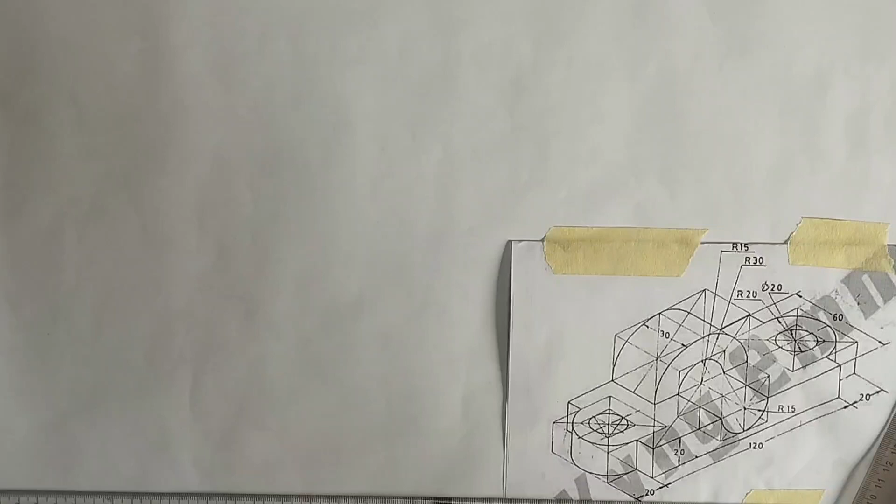In this video, we are going to be constructing the isometric block on the screen. So first of all, we are going to be drawing our straight line. That's our reference line. After that, we are going to be projecting angle 30, as you can see here. This 30-degree.

Please make sure you are using thin lines for this drawing. As we are going to be starting, make sure you are using thin lines for all lines. All construction lines must be in thin line. So we draw this. As you can see, this place is 20, so we'll pick our 20 millimeter. So we'll pick our 2 centimeter.

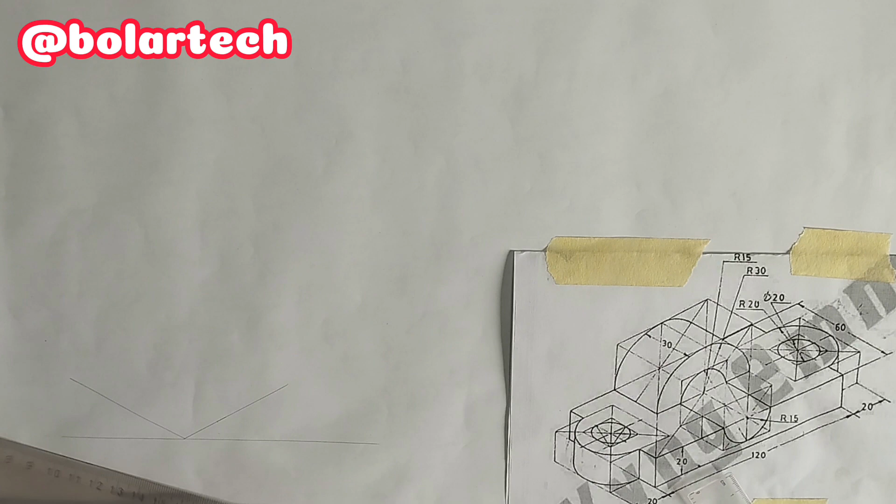From that point, draw another line coming like this. So this place is going to be 10 millimeter. That's 1 centimeter. We pick it like this. So from that point, we are going to be drawing a straight line. Please make sure all your lines are in thin lines.

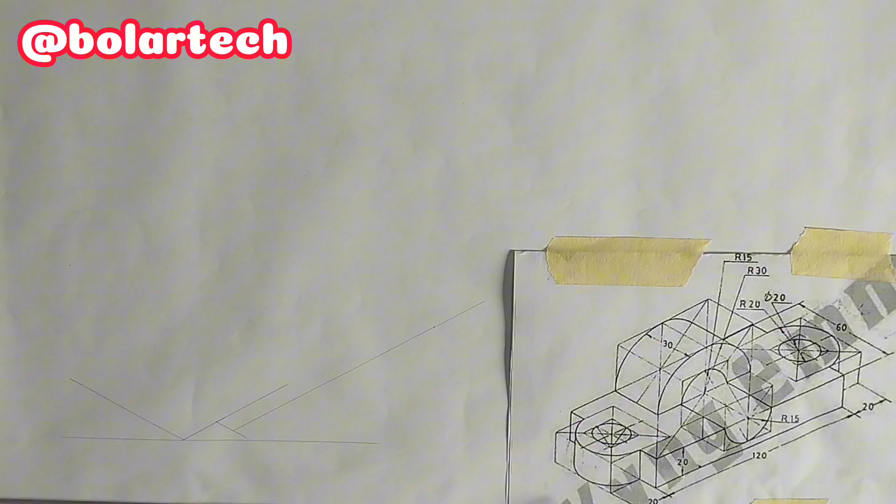And as we can see, this is 120 millimeter. So this place is going to be 120. That's 12 centimeter. So now we draw a straight line up like this, and in this part also we draw another one up like this.

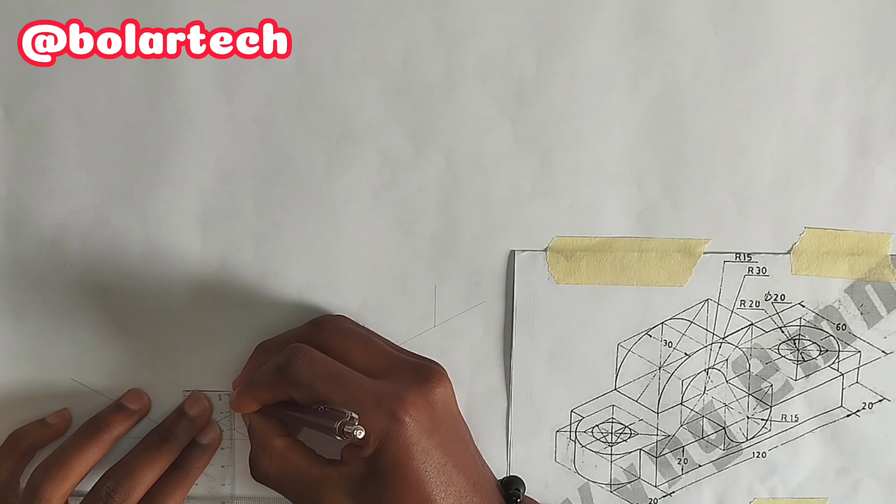So as we can see in this place, this is 20 millimeter. So we pick our 20 millimeter here and draw like this. Draw like this. So from here, we are going to draw a straight line upward here. So with our angle 30-degree, we join it here.

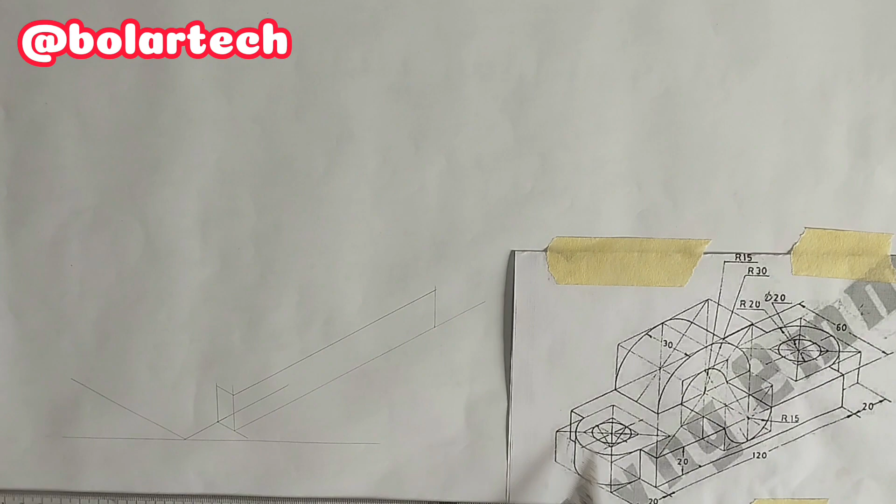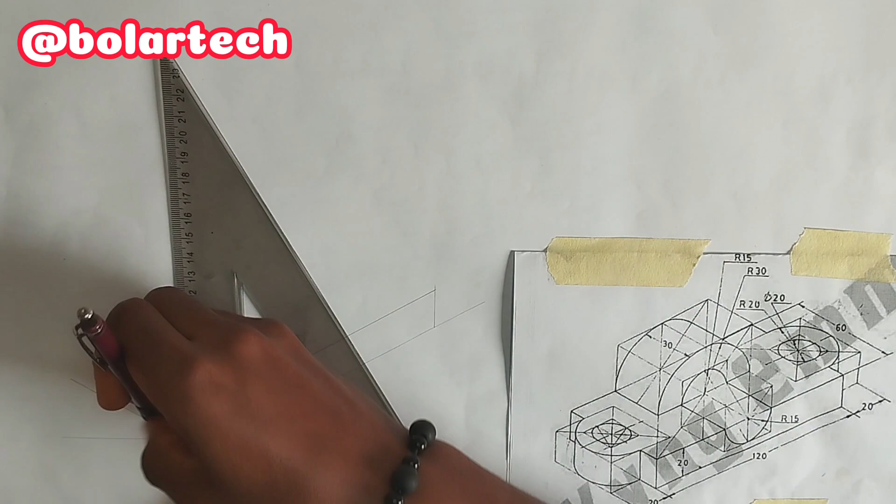Now we are going to be drawing this place that is here, and as we can see, from here to here is 60, and this place is 10, this place is 10. So definitely this place is going to be 40 millimeter. So we'll pick our 40 millimeter from here. This is 40 millimeter. So we draw our straight line up like this. So from here also we draw straight line up like this.

So using our set square, we draw like this, and we draw like this also. So that's that for this place. So now we are going to be drawing this top here. So we'll draw our inside like this. Please make sure all your lines are in thin lines, and as we can see, this place is a continuation here. So we are going to be using our set square like this,

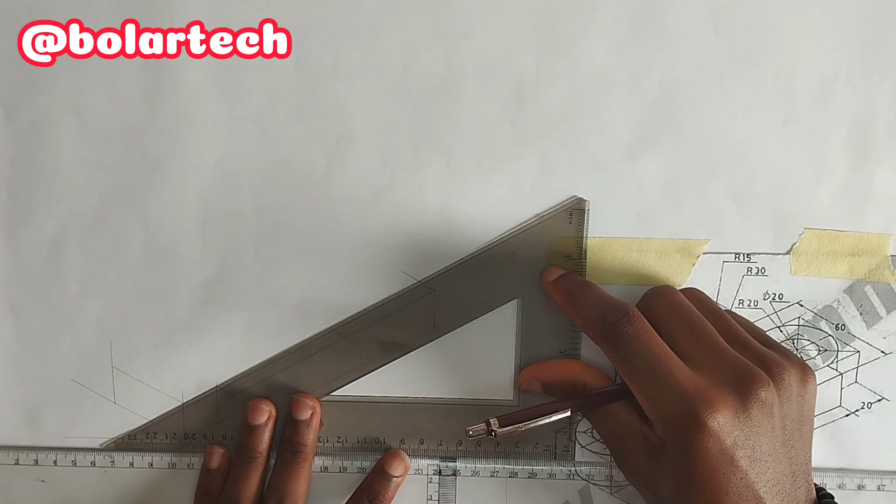and as we can see, it is 20 millimeter. So we'll pick 20 millimeter there like this, and from that point we draw our 30-degree like this. Please make sure all your lines are in thin lines. So this place is going to be 40 millimeter, just as the down part is going to also be 40 millimeter.

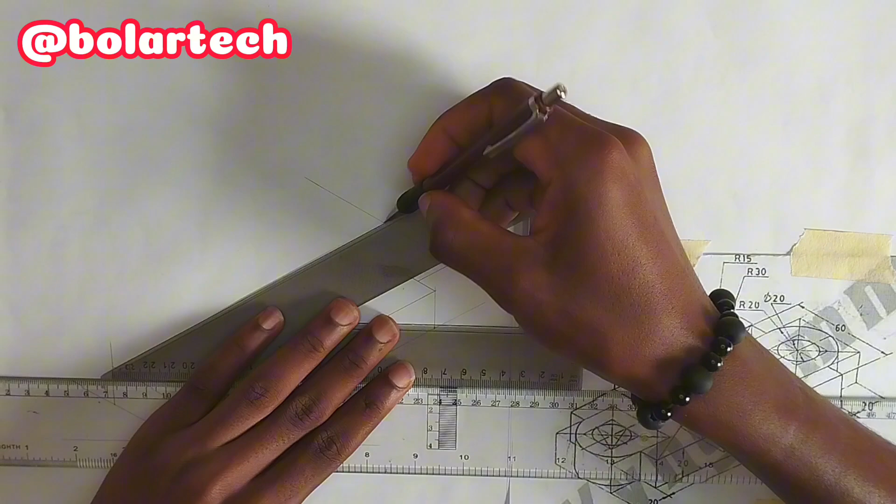So that's for that. We'll pick here also like this, bring it down. So this place also will be like a continuation for here. Draw here. So without forgetting this part, let's quickly draw this part. So from here, this place is going to be a continuation for here. So we just draw from this place like this, and join the line like this. So we have done that already.

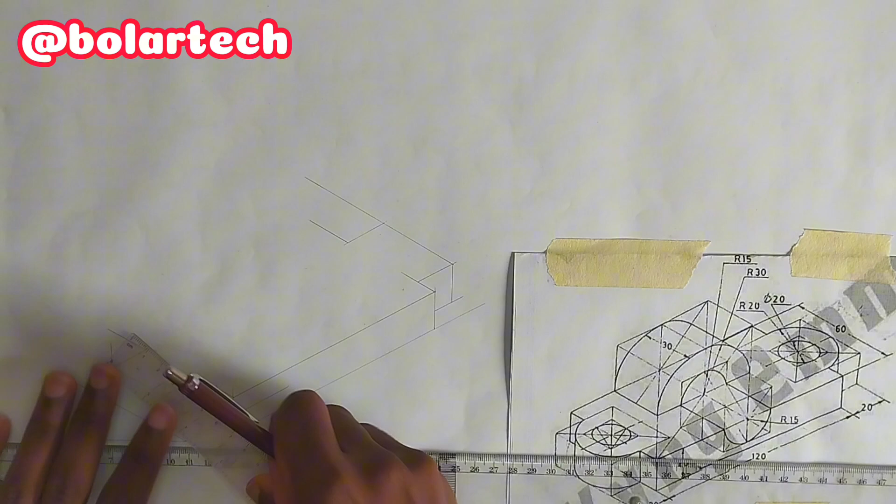So now this place, we are going to be picking our 10 place. But before we do that, let's first of all bring this like this first, then this line is going to be continued here. So it's going to go like this. This isn't touching it well, so let's bring it. So this place is going to be 10 millimeter. That's 1 centimeter. So we pick it like this. So from here, the line is going to be hitting this other place. So we draw it like this.

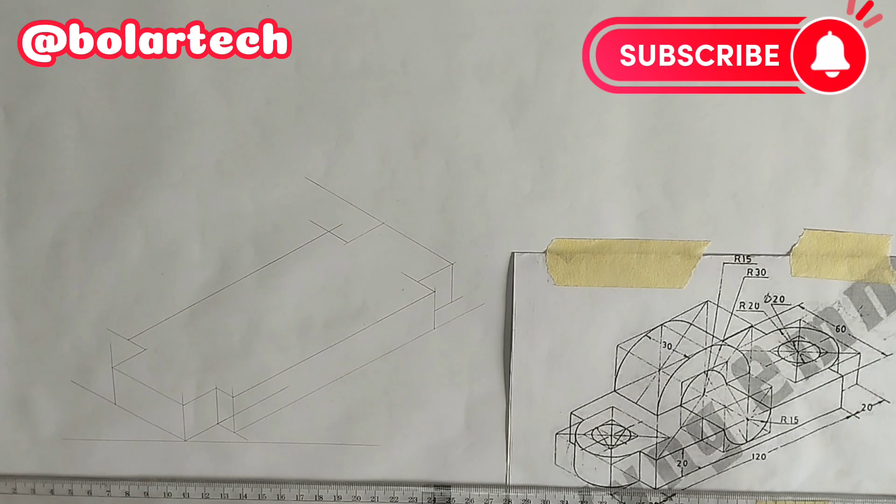Okay. So now we are going to be drawing this part of the circle, that is this part that is here. So as we can see, this place is 20, and we have the radius of this circle to be 10 millimeter, and the diameter is 20 millimeter. So what we are going to be doing now, we'll pick another 20 millimeter like this.

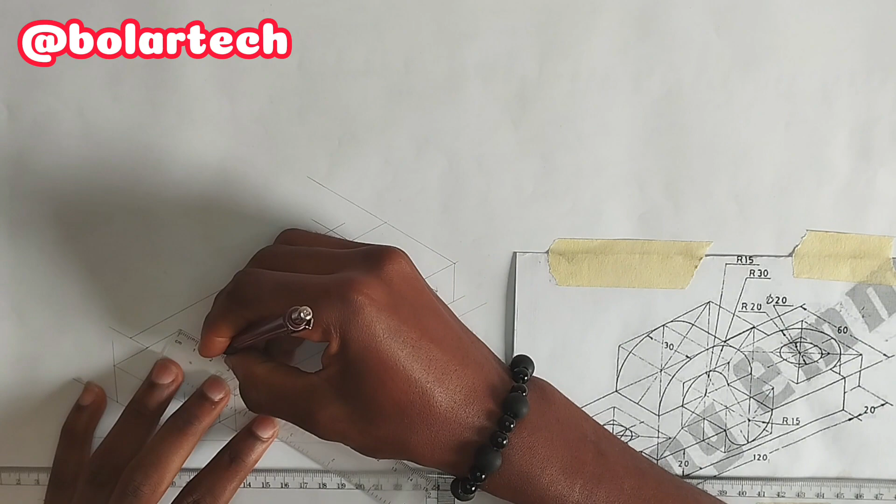Are you with me? So now we'll project a line like this and another like this. Then from here we are going to be joining these two lines. So we are going to be picking the middle of this line, that is 20 millimeter. So we'll pick here like this, and we are going to draw it like this, and like this, and like this. So in order to draw this circle in the middle, we are going to be picking the longest edge of this particular square.

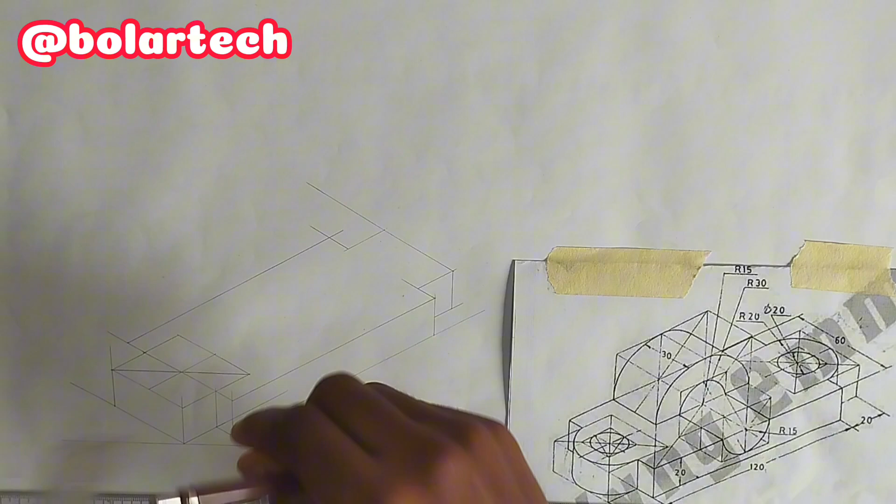So we are going to draw a straight line for the longest edge. It is not going to be here because this is not the longest edge. This is the longest edge. So that's where we are going to be drawing. So from there, as we know, the diameter of the circle is 20 millimeter, so we'll pick 10 millimeter to each side. That is 10 here, 10 here, and 10 here, and 10 here. So let's draw a square.

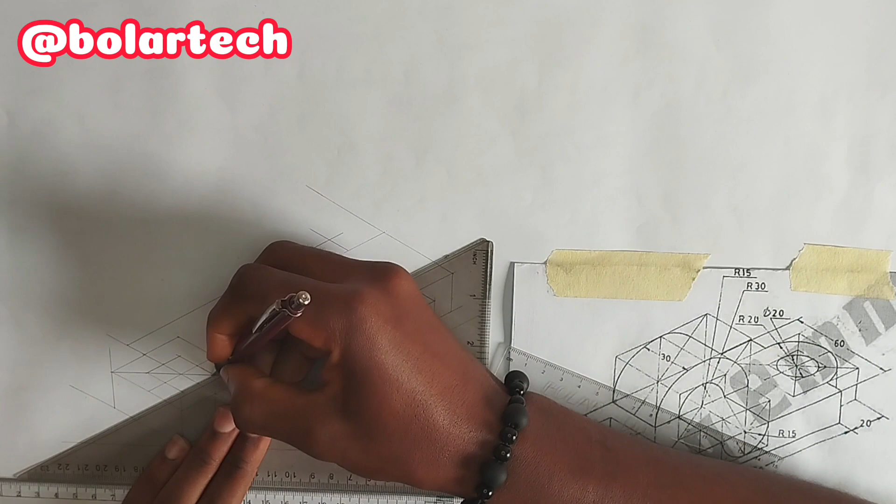So it will go like this, like this, like this, like this, and like this. So now from this point, we are going to draw a straight line here and a straight line here. So it goes like this, like this, and like this.

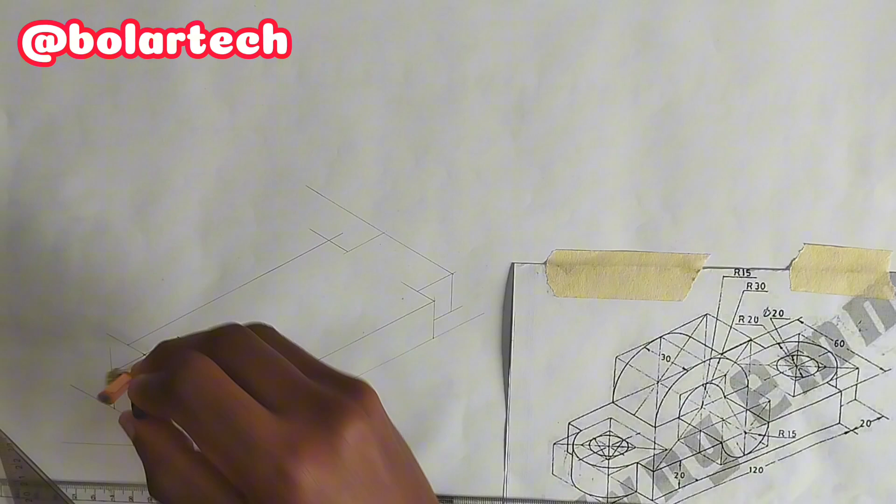So now we are going to be making use of our compass. We are going to first of all place our compass at this edge here, then measure this edge to this edge, draw our curve first, then you place it at this other edge, draw our curve. I will advise you to be thickening out the curve, because it is not always easy to thicken out circles after the drawing, so I will advise you to thicken out the circles as you are getting it right.

So we'll place it at this point also, draw here, and place it at this place also. So we draw this last curve. So that's for this circle that is here.

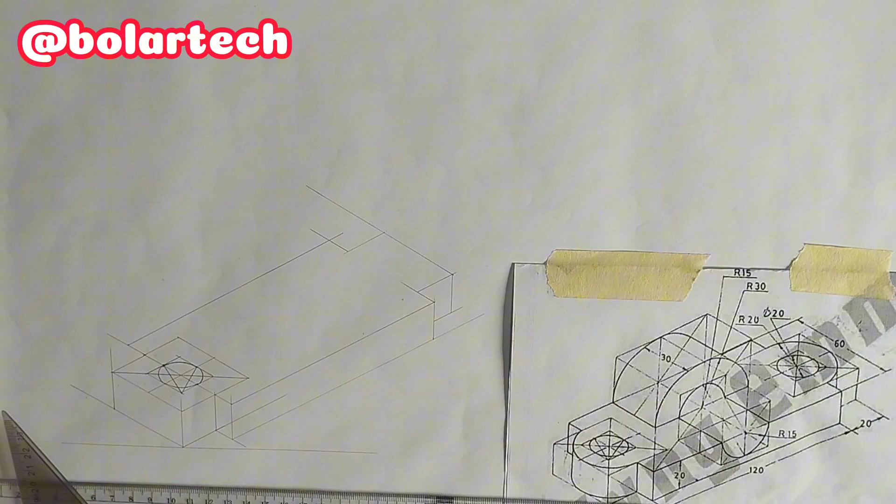So now we are going to be drawing this particular curve, as we can see in this place. So to draw that one is very simple. We'll pick from this edge here, and just draw a nice curve from this edge.

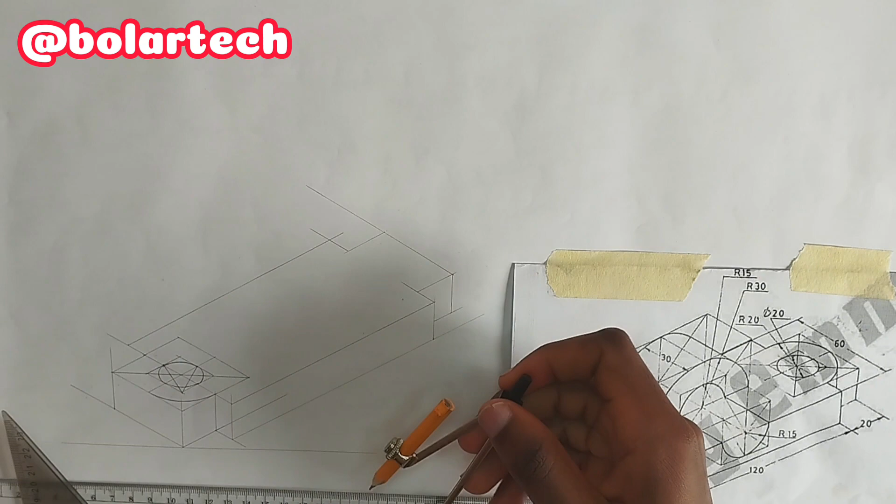Then to draw this place, as we have done in this place, we are going to pick from here to here with our ruler. We'll draw just a straight line from this edge to this place with our ruler. So where the line is cutting each other with this diagonal, we'll just draw a curve. So that's the way it is going to be.

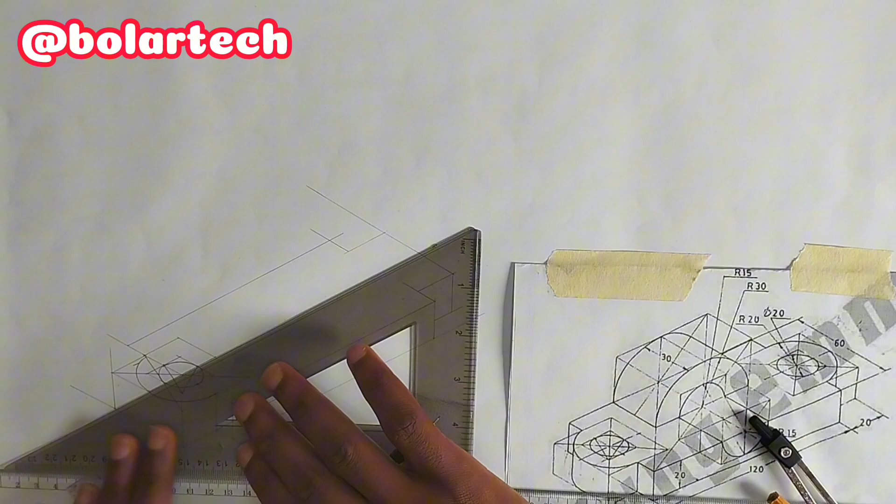So now we are going to be drawing the other curve that is going to be down here, that is this place. So to draw that one, we are going to be projecting this place like this. Please make sure it's in thin lines in order not to get confused. We project this place like this. This place is projected already, so we pick our 40 millimeter from here. So from this place, you join it with this other point.

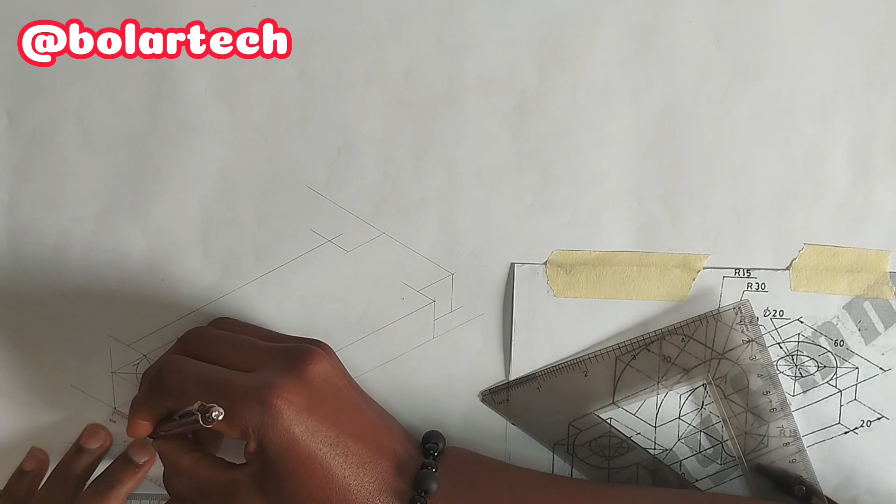I will advise you to thicken out those 4 points at which you have picked your 40 millimeter in order to avoid confusion. So we'll pick half of this line, that's 20 millimeter, like this. So it will be like this. So we are going to pick half here also, which is also 20 millimeter. So this is it already. So we'll draw it like this.

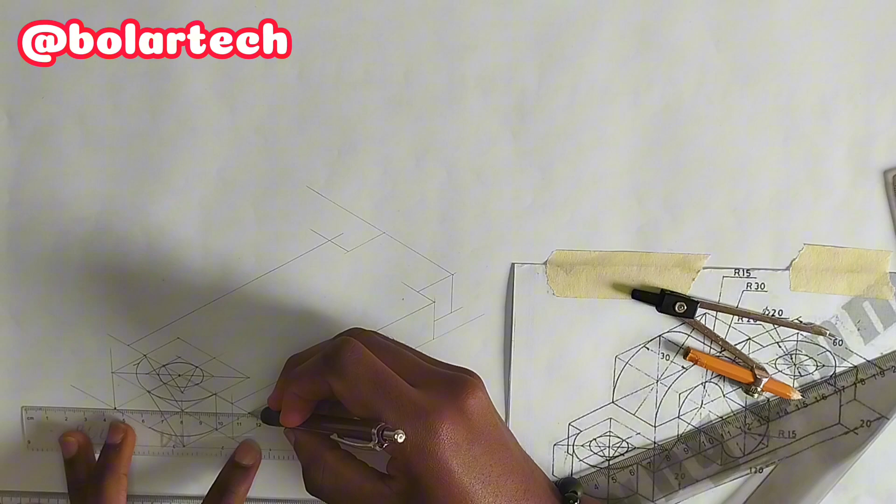So now, in order to draw this curve, we are going to place our compass first at this point here. Place it at this point, make sure it's touching here also. So we'll join it like this. So in order to draw here, we are going to pick our compass, our ruler, and our pencil. We'll draw from here to here. We're also going to be drawing the diagonal. Don't let us forget that.

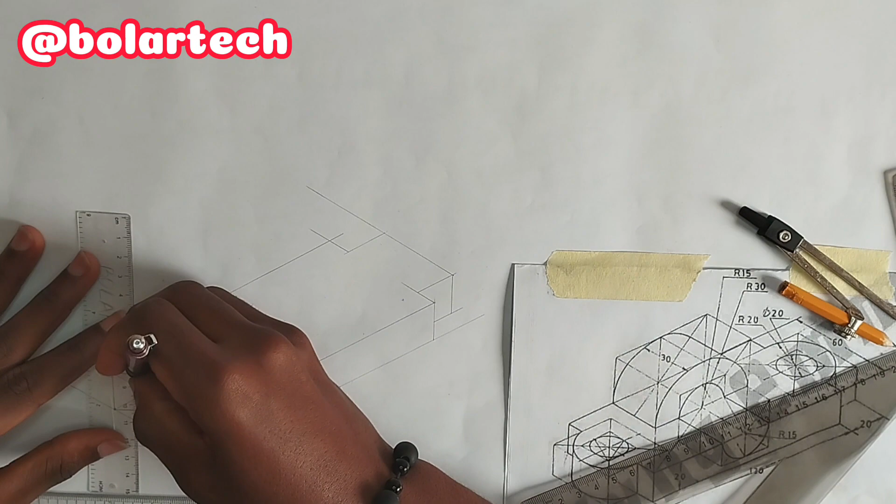So from this point at which it is cutting the diagonal, we would draw our curve. So in order to perfect it, this place from here and here, we are going to join it together, and also here and here is already joined together like this. So you can just thicken this place out. So that's for here. Let's draw our straight line here. Yes, that's for this place.

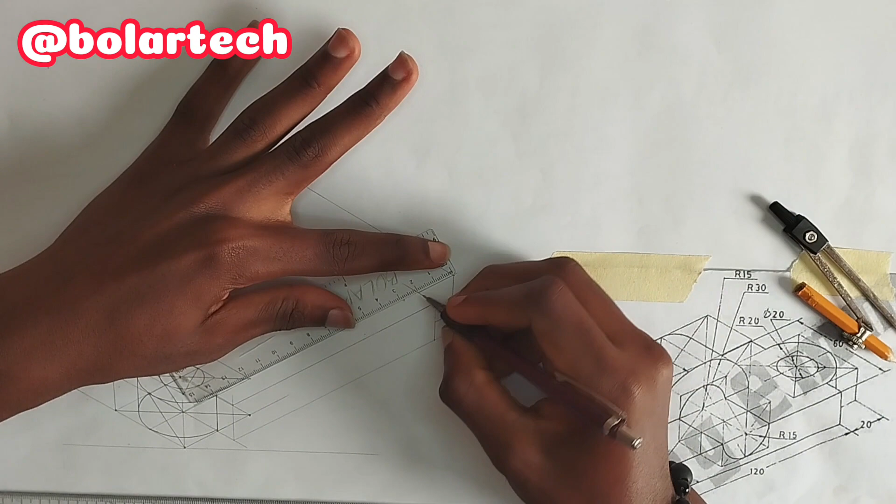So now we are going to be moving to the back part also. It's also going to be the same way. So this place is also 20. So we pick our 20 here and 20 here. So it's going to go like this, and like this. So we draw it like this.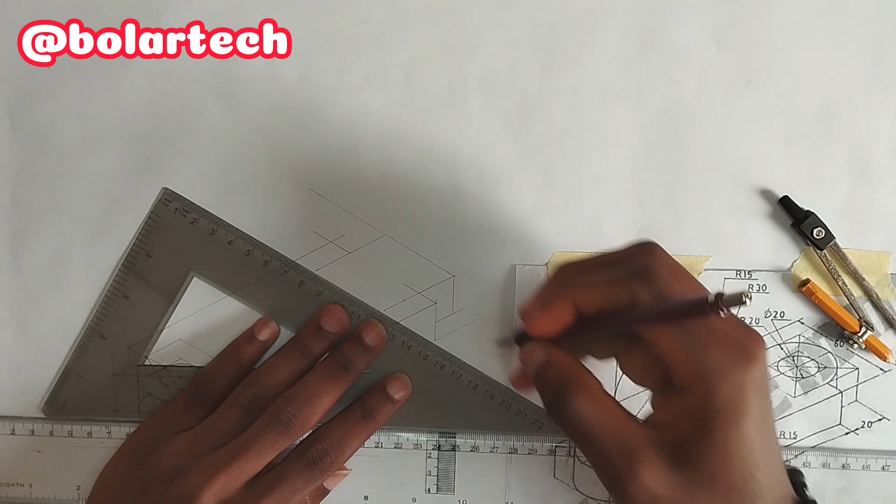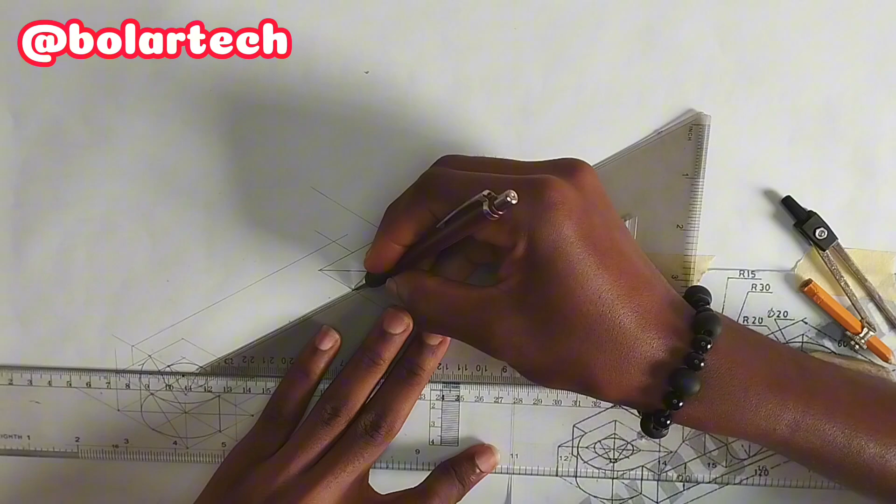We are going to be drawing this box inside here. So in order to draw that, we are going to first of all draw our diagonal, that's the line that is passing through this place. So we are going to pick 20 millimeter here, that's half of this place. And we're also going to be picking 20 millimeter here, which is already there. So we'll pick our T-square like this, our set square like this.

I will pick here also like this. So now, as we can see, this place is diameter of 20 millimeter. This place is diameter of 20 millimeter. So we are going to be picking 10 millimeter up, 10 millimeter up, 10 millimeter here.

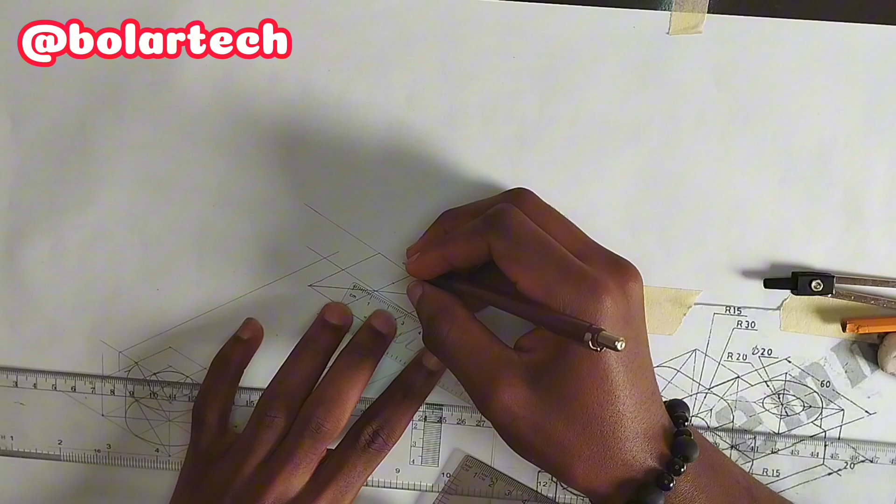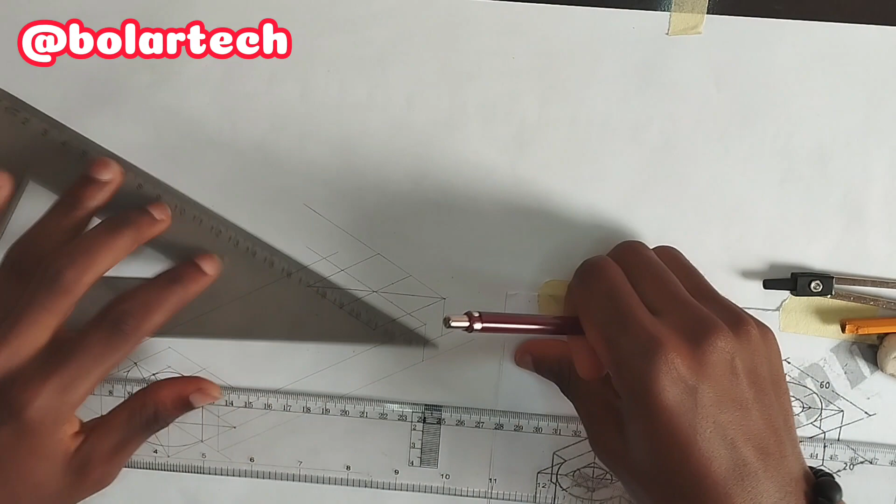So we pick 10 millimeter to this place also, like this, and 10 millimeter here also, like this. So we are going to draw this like this, like this, like this, and like this.

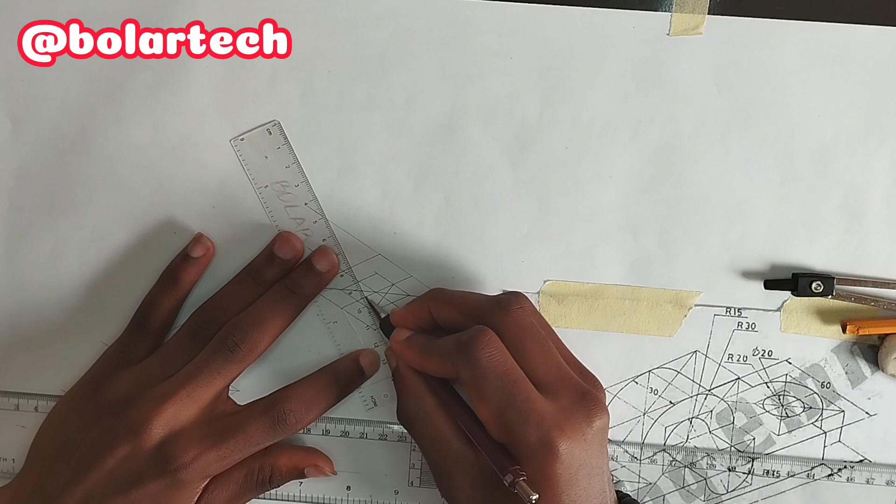So now, in order to draw this circle, we are going to pick from this point, from this last edge here to this point, first of all, the same way we did for the first part. We pick from here to here, and from here to here. Placing your compass at this edge here, this last edge here, you place it at these 2 points. Make sure it's touching those points.

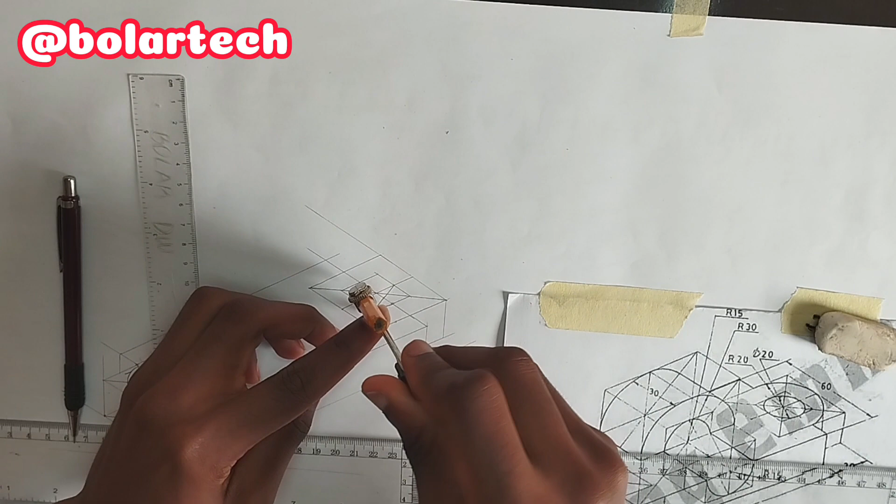So we draw our curve as usual, then we place it at this place also, same way we have done at the first place. So we draw our curve, then we place it at this point, as you can see here. Draw our curve, then at this place also, like this, to draw our curve.

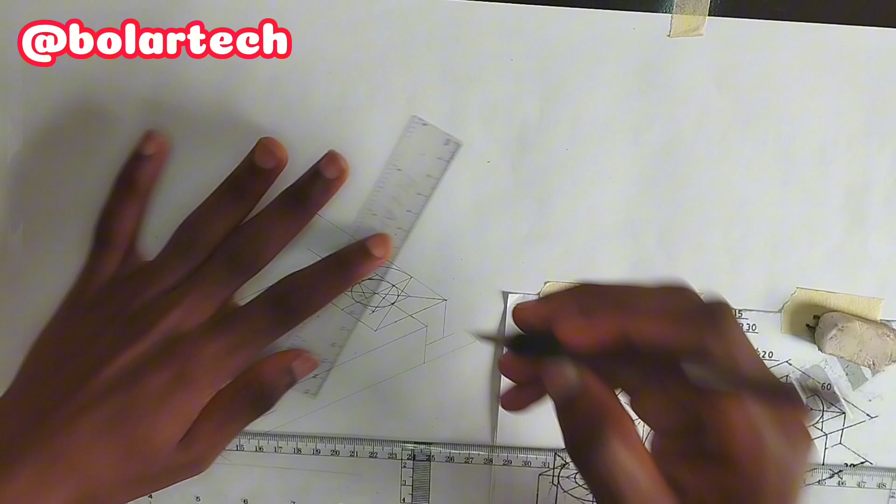So now we are going to be drawing this part here, which is very easy. From this place we are going to extend our compass like this, and draw an arc here, like this. So now, in order to draw here, we are going to be drawing a straight line from this part to this place. So where it is cutting the diagonal line, we are going to put our compass there and place our compass at the edge of this place, and draw our curve like this.

So we are going to be drawing this straight line down, which is very simple. So from this point here, this diagonal point, we just pick our straight line down. So that's that for this place. We are going to be moving straight to the center, which is this place.

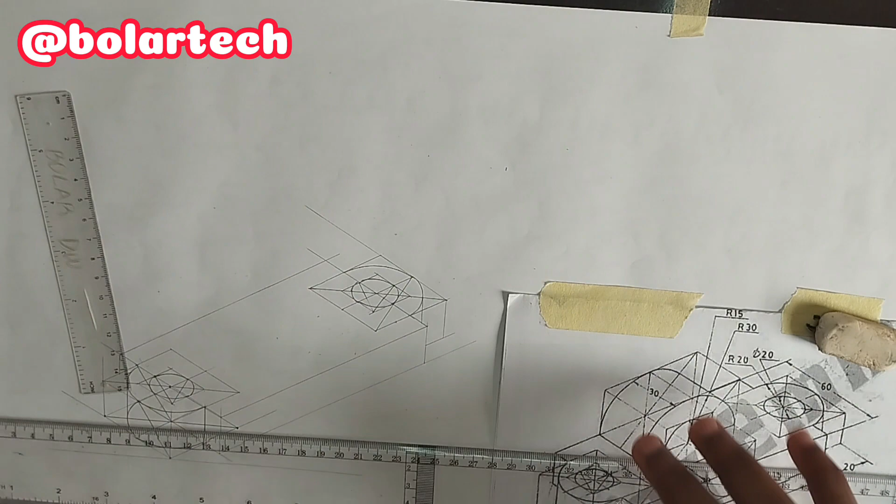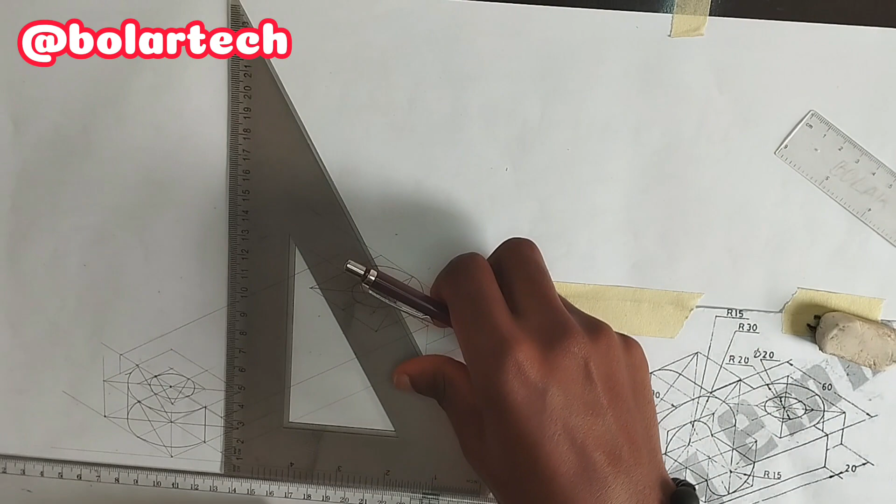So now, in order to draw the center, we can see that this place is 30 millimeter. So we are going to be drawing a straight line upwards from here, like this. So from here to here is 30 millimeter. So we'll pick with here, and it's 30. So this place to this place is 30 millimeter.

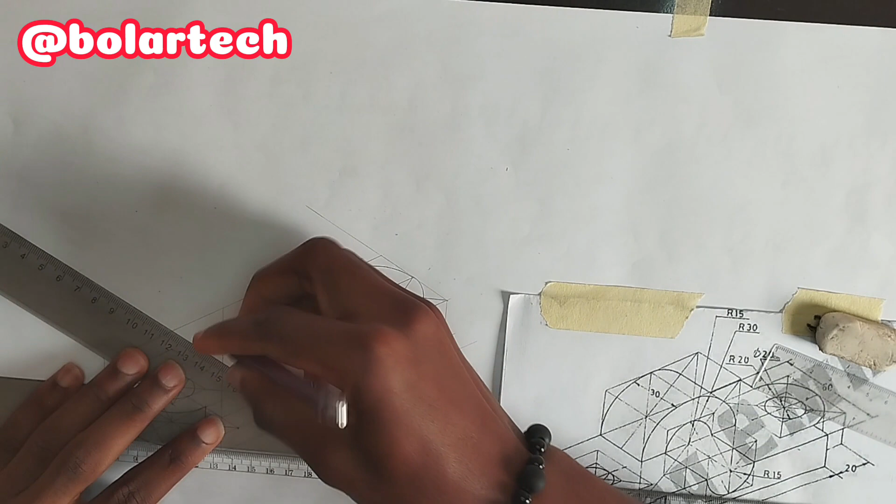So we'll draw our 30 degree like this, and we draw like this also. So it's going to go like this. Please make sure you are using tinting lines. And we'll also draw our straight line up. So this place is also going to be 30 millimeter. So we pick 30 millimeter here. This place also is 30. So we'll extend here up a little bit, just 30.

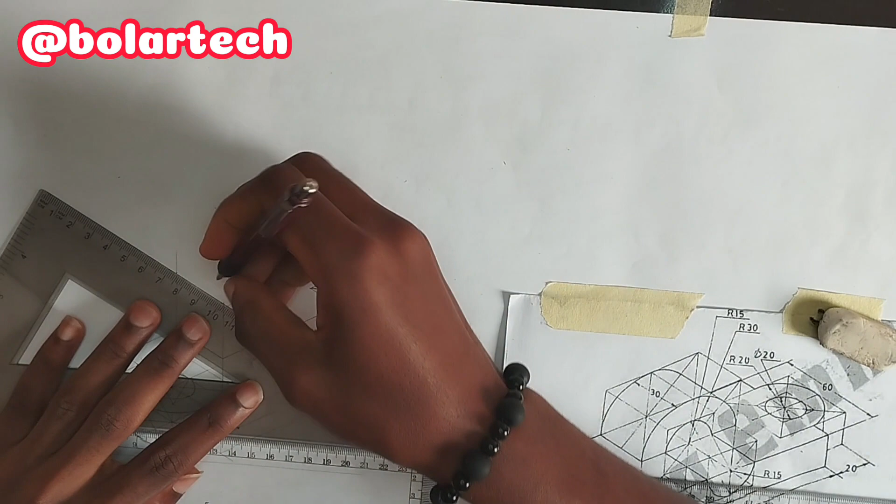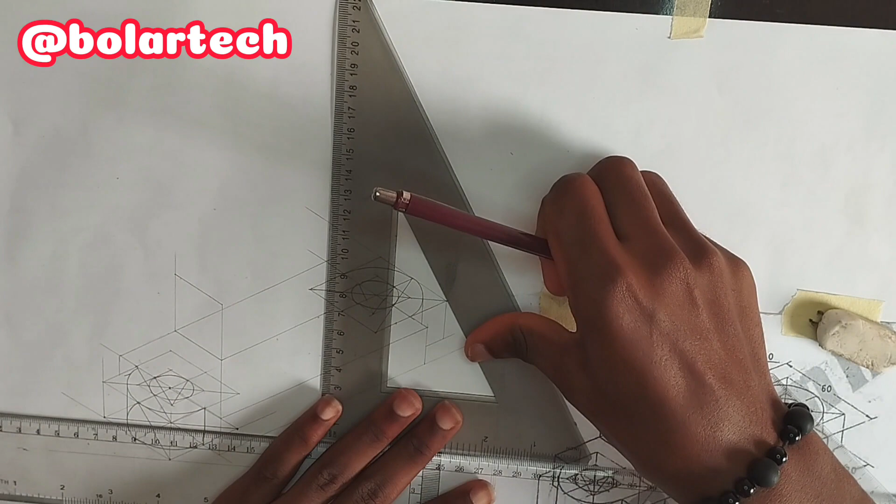So we are going to be drawing like this. So this place, as you can see, is 60 millimeter. So we'll pick 60 millimeter on our ruler. So now we are going to draw a straight line upward from here also, like this, and also draw to this point like this also. Then we are going to be drawing from here like this. So now we have drawn the box.

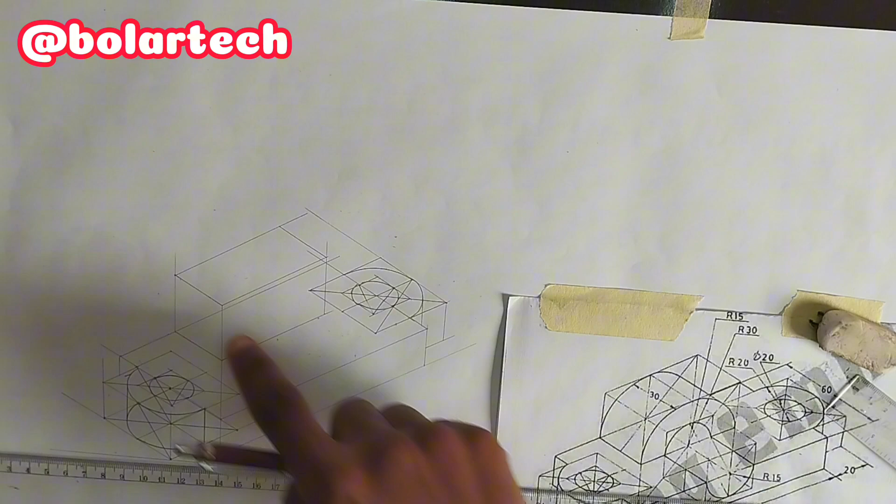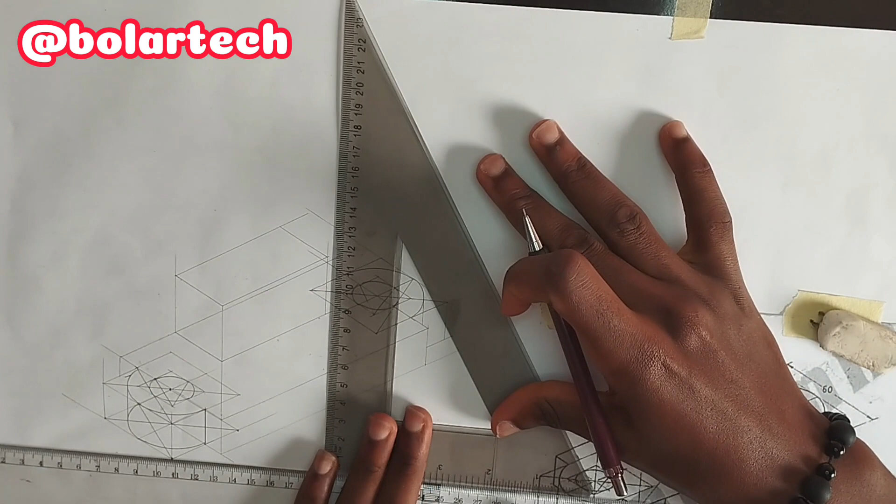We are now going to be drawing the curves there, which is always the easiest part. So first of all, we'll start with the front curve. So we'll draw our line down. We want to draw a half curve. This place is 30, so we'll pick another 30 millimeter downward, and here also we'll pick another 30 millimeter downward. So we draw a straight line from that point to this place. So we are going to be joining these two lines together like this.

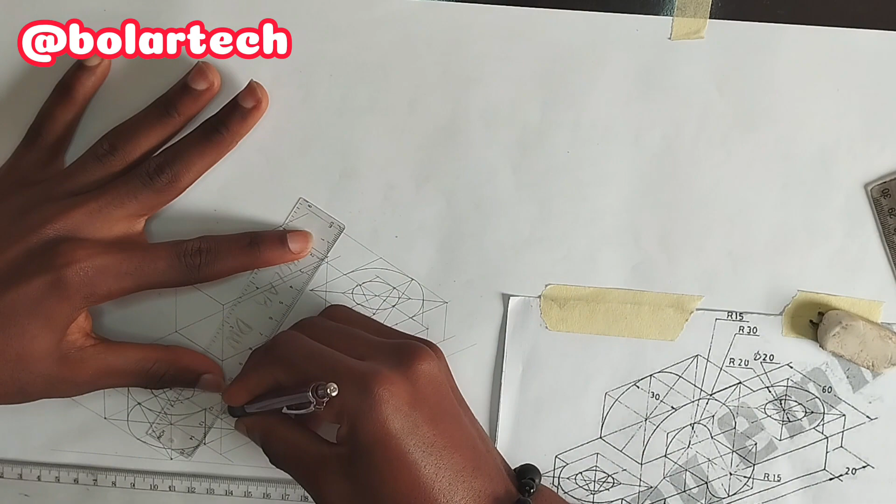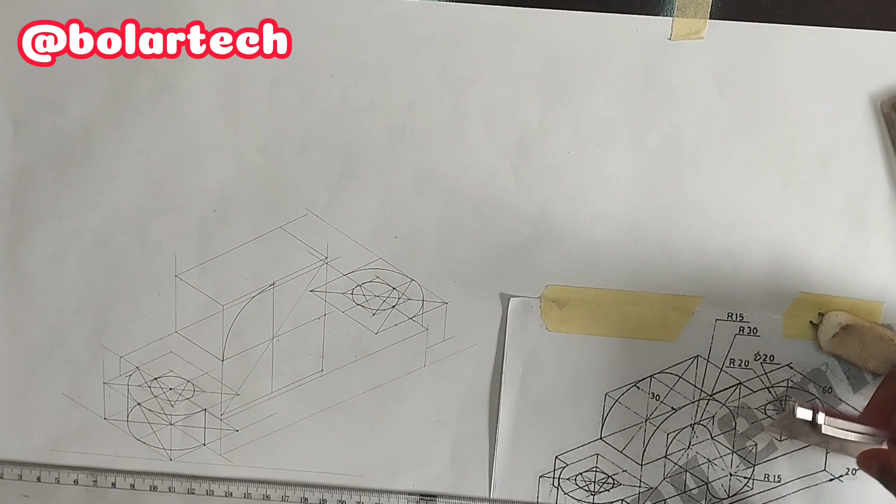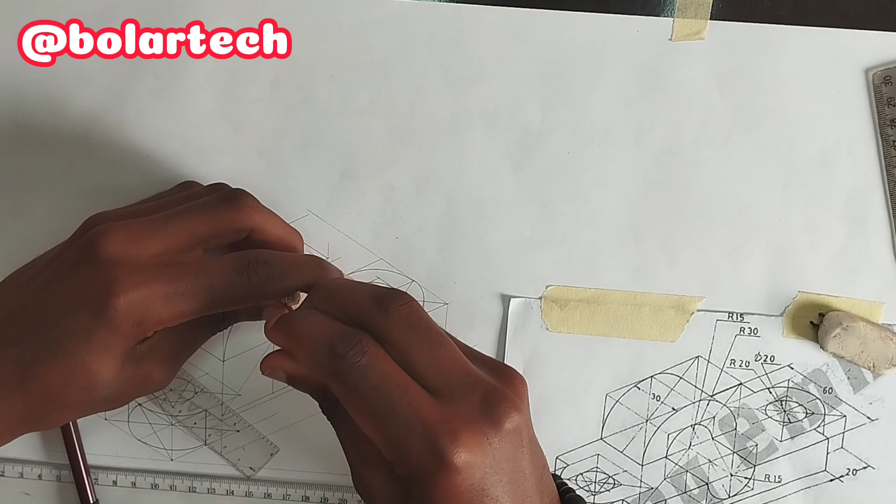Curve like this. So now to draw here, as we have been doing in the previous ones, we would draw from here to this edge here like this. So from here we'll pick this point, then from this point we draw our curve like this. So that's the way it will be.

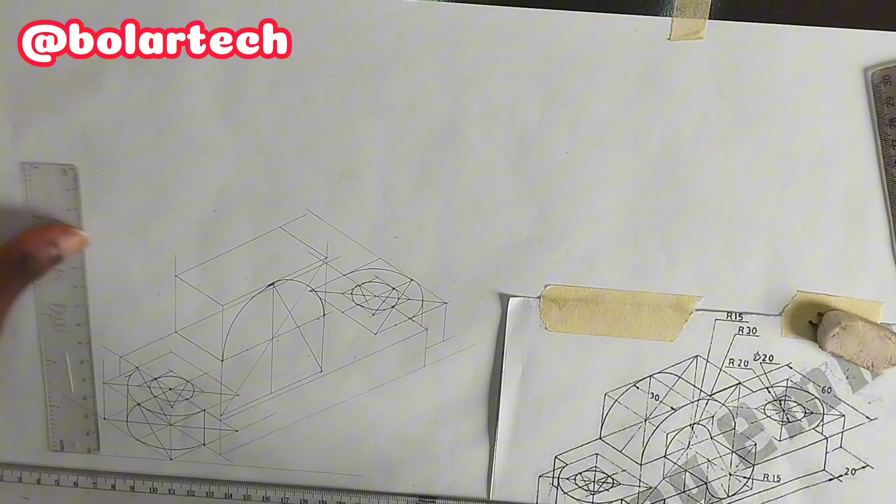So we are going to be drawing the one at the center. As we can see, the radius is 15 millimeter, so the diameter is going to be 30. So we just pick our 15 here, 15 to the left, and 15 to the right. 15 millimeter. So we'll pick 15 up and down here also like this. The radius is going to be 15.

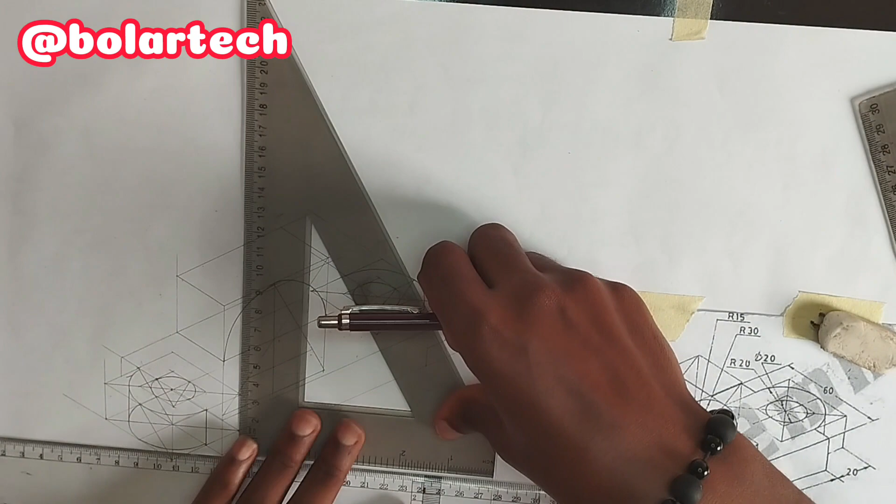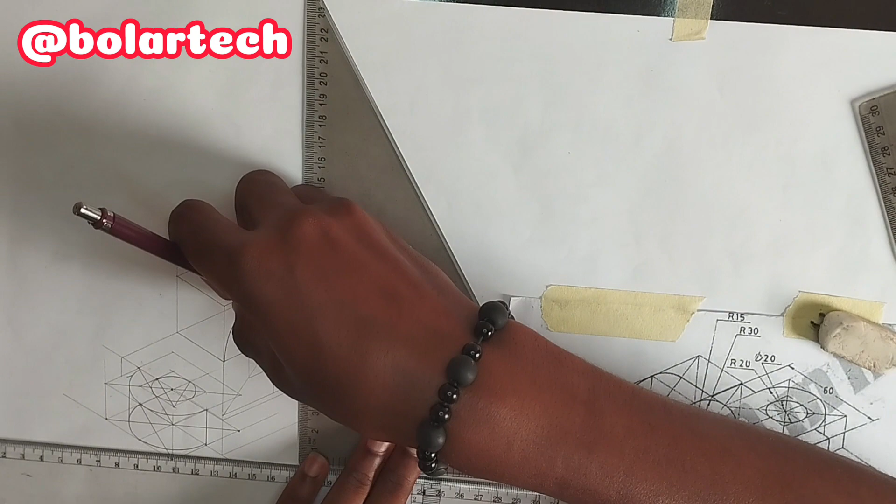So we draw our, please make sure you're using thin lines, please, in order to avoid confusion. Make sure you're using thin lines. So from here also we draw a straight line upward, and we draw here also a straight line upward.

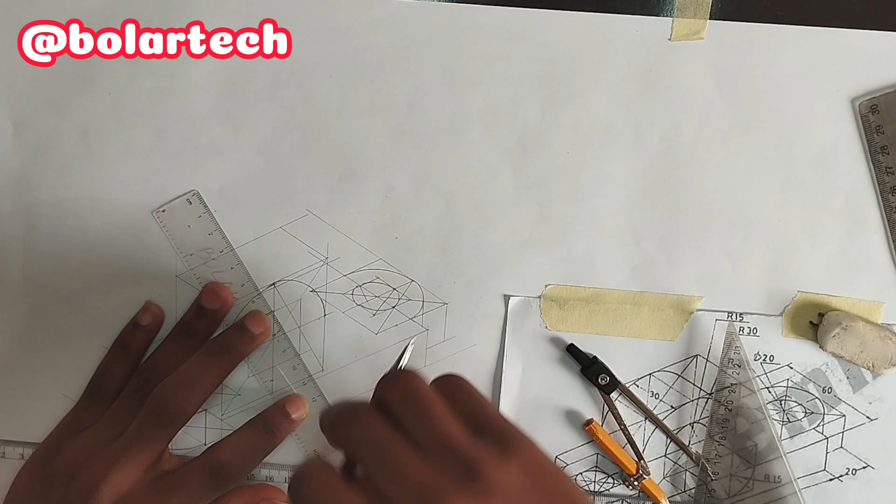So to draw this curve here, we are going to be doing exactly the same thing. We'll place our compass here at this point, then extend it to this place here, and draw our curve. Then to draw here, we are going to pick from here, as we have drawn this already, from here to here, from here to this place. So we'll draw like this.

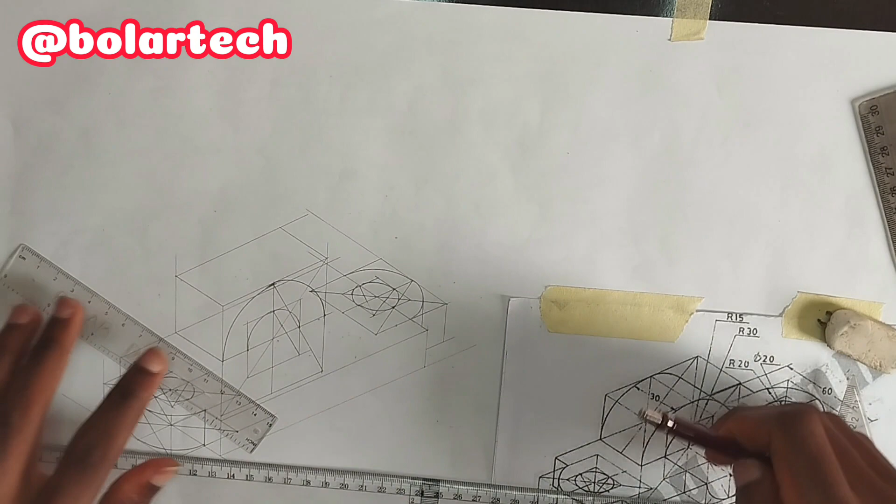Draw it like this. So we have drawn this part already. You can just join this like this and like this. So now we are focusing on the curve at the back. So we'll pick our line also downward, which is, this place is 30. So we are going to be picking another 30 to the bottom, which is going to be landing somewhere here. We'll just draw our straight line like this.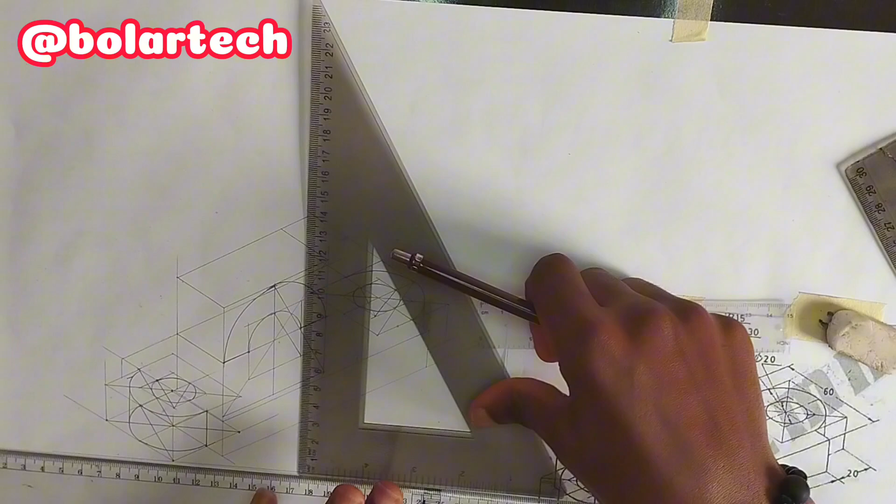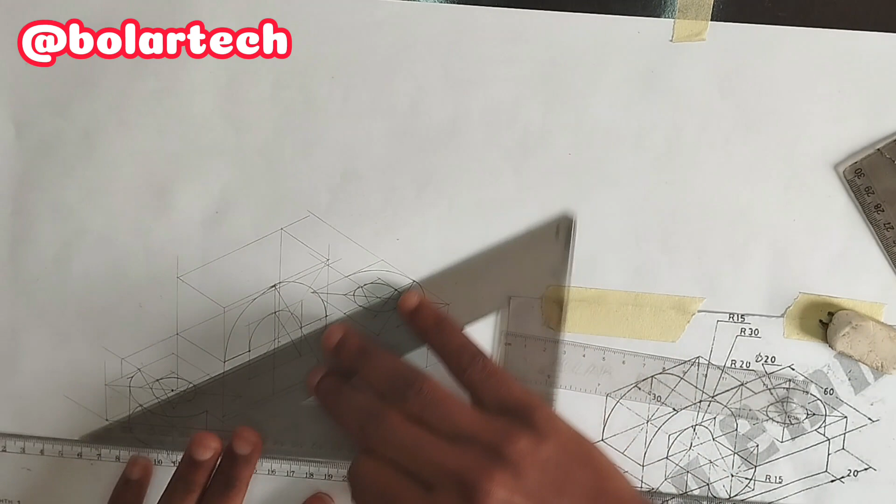Please make sure you are using thin lines like this. So from here also, we'll draw a straight line. This part from here, we draw a straight line downwards and measure our 60. So our 60 is going to be around this point. So we draw our perpendicular line. So in order to avoid confusion, let's thicken out those four corners, those four places.

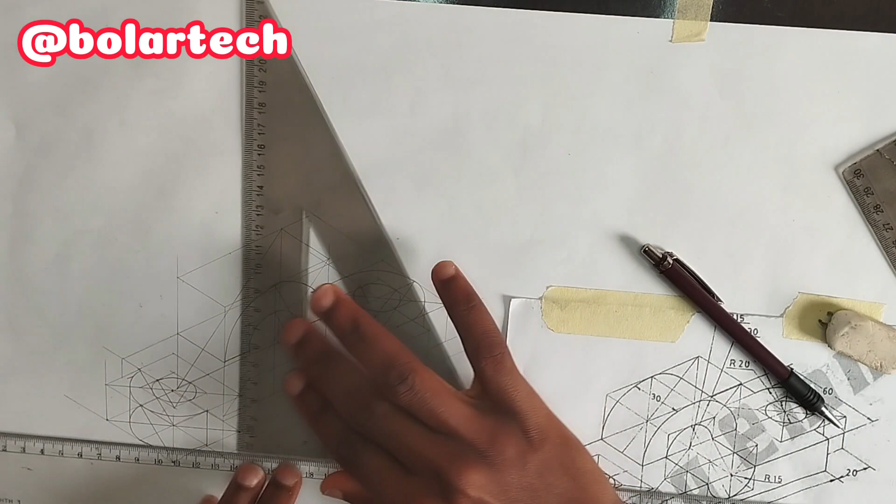So now from here to here, we are going to be drawing a straight line, that is the longest diagonal. So we draw our straight line. We have gotten the half already, so we only need a half in this place, which is 30 millimeter. So from that 30, we are going to be projecting a straight line downward. Please make sure you're using thin lines in order to avoid confusion. So these are the points.

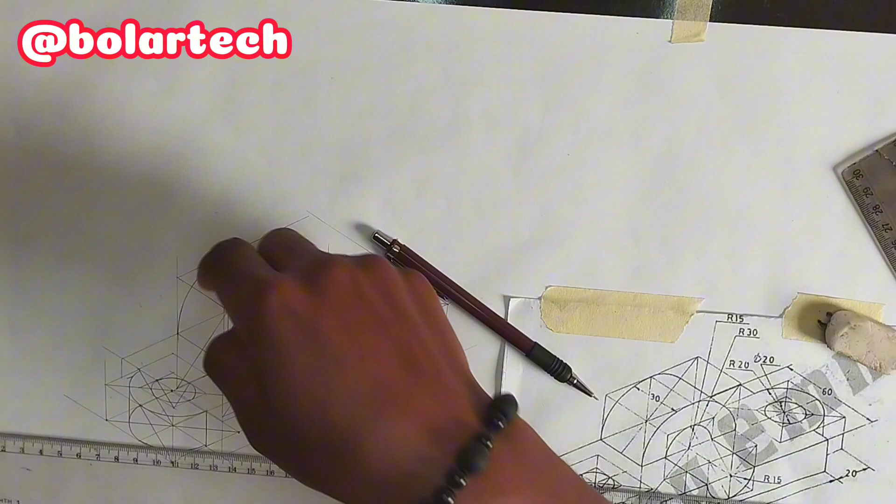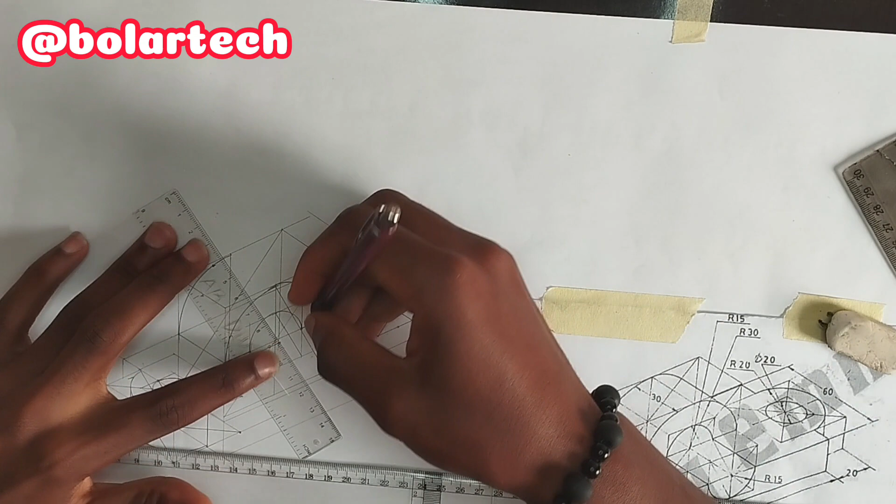So from here, to draw this curve here, we'll place our compass at this edge here. That's this last point. We extend it to this place like this and draw. So now we are going to be drawing this other curve to this place. So in order to do that, we are going to be picking our compass from this edge here to this place like this. Please make sure you're using thin lines.

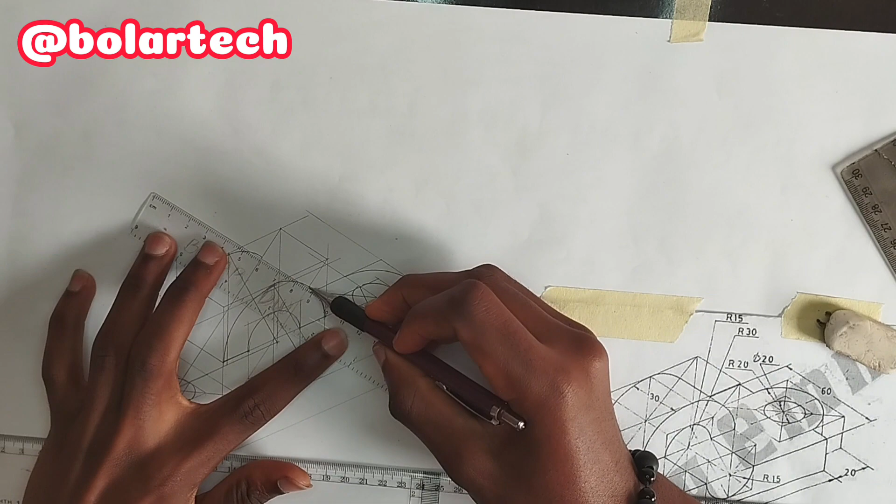From here to here, we'll draw a straight line. Then at this point in which they meet, we are going to draw a curve to this place, just like this. So to draw here, we'll draw from here to this place like this. So now we have finished this place. So now we are going to be drawing this curve here, which looks like a hollow, opening to this place. And as you can see, the radius of this place is 15 millimeter, so definitely the diameter is going to be 30 millimeter.

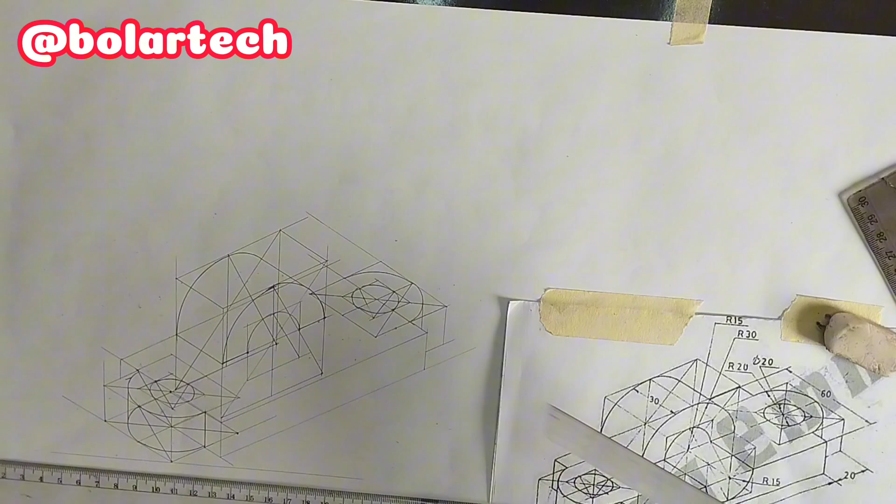So we'll project our line outwards from this point. Please make sure it's thin lines in order to avoid confusing yourself. So now from this part we have drawn here, we are going to draw our straight line downward like this, at this point which it is meeting, this line here. We are going to draw a straight line. We're also going to be doing the same thing for the other part like this.

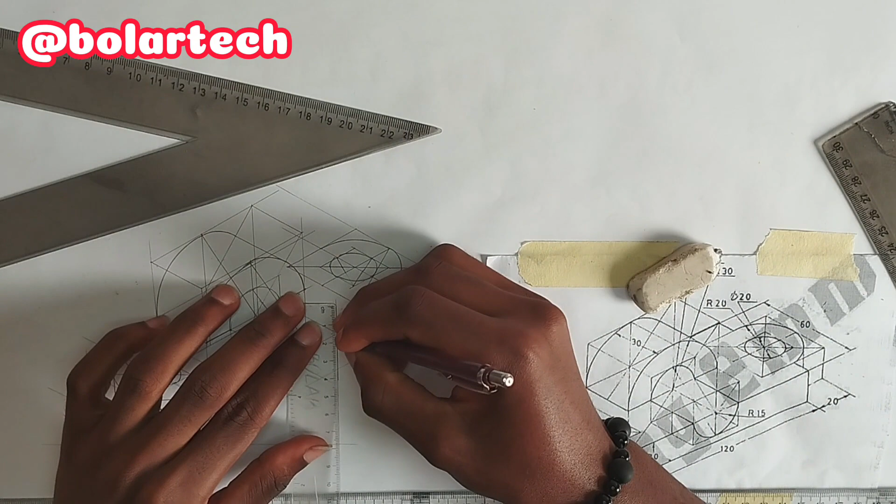So now we will draw. We know that the radius is 15, so definitely the diameter is 30. So we'll pick 15 upward here and 15 downward here. So we'll use our set square like this to complete it. So it goes like this and like this. So we'll pick the center in this place also, which is going to be 15 millimeter. So it's going like this way.

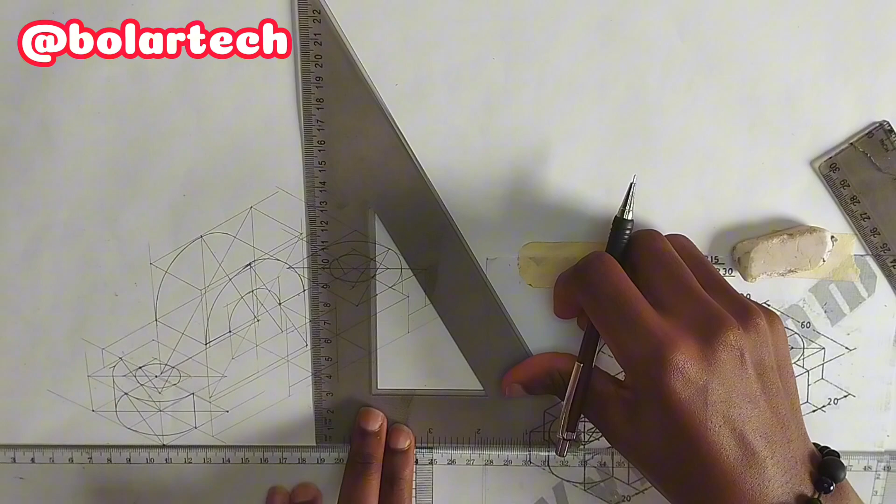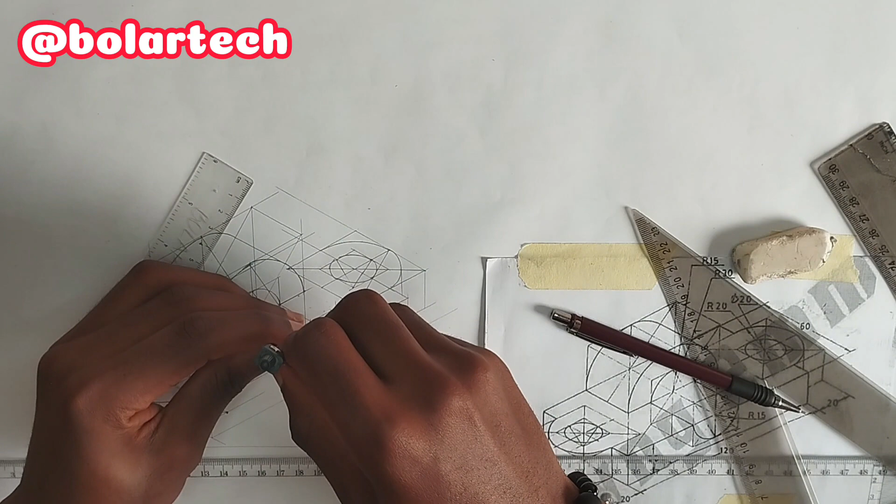So now in order to draw this curve, we are going to be picking the longest diagonal. So we'll draw our straight line like this. So from here we'll pick our compass and draw the curve like this.

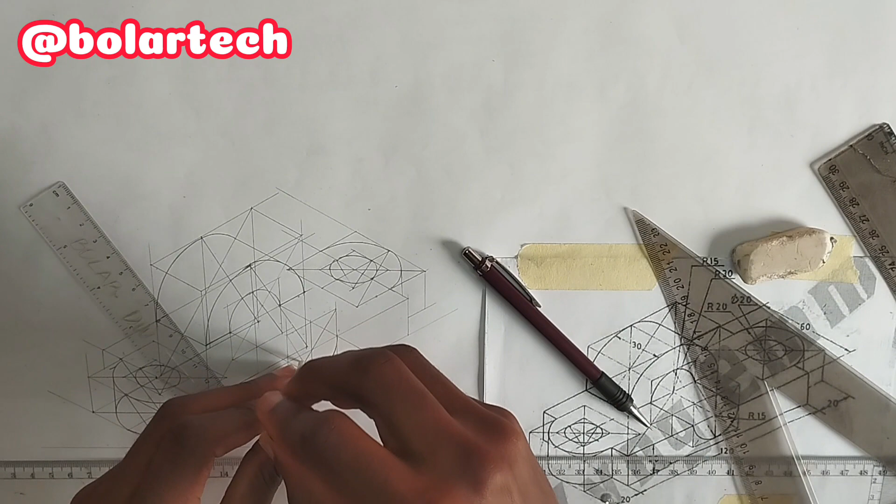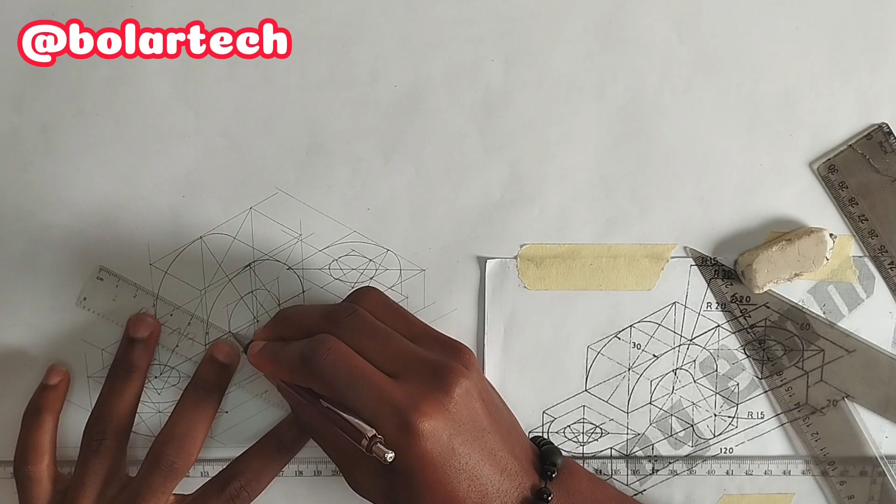Now in order to draw this curve here, we are going to be drawing from this place to this place like this. So it's going to be from here like this. So now that's our hollow here. So what is left is for us to thicken out all the needed parts and leave our construction lines alone to be seen.